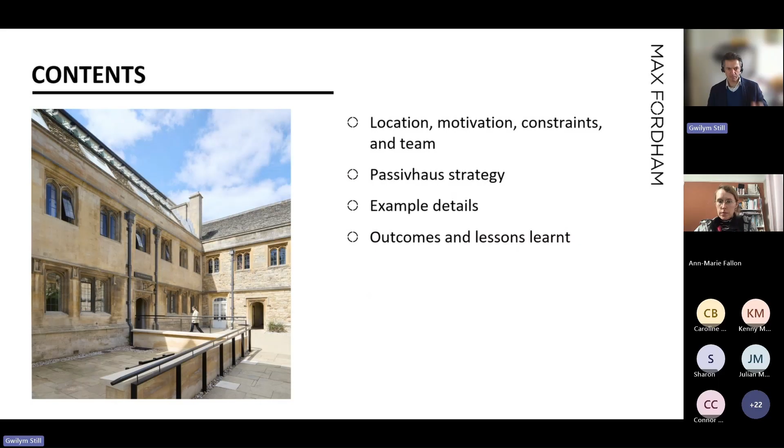Okay, hopefully that's coming through okay. So I'm going to chat about the Spencer building in Oxford, going through both the passive house design side of it and some bits from delivery as well, and then some reflections and lessons learned that we've taken from the project. As a running order: talking briefly about the location and motivation, some of the constraints that came with the site and the project and the team who worked on it, then the overall passive house strategy, and then talking about a few different individual details, picking up on the common features of a passive house project, and then a bit on the outcomes and the lessons learned from it, framing it more widely in other projects as well.

So the brief for the project then really came from Corpus, a very long-standing college in Oxford. They wanted to increase their study space available for their students in particular. They wanted to improve accessibility. They wanted to provide archive storage - they've got lots of precious manuscripts and things they need to preserve. And as with lots of institutions, they're keenly aware of their environmental responsibility as well, so they wanted to do something that was really sustainable. As part of that wider context, they're a long-standing Oxford college, so this is the first time basically that they changed their library in more than half a century. So it's quite a big deal for them and for everybody else who got to participate in it.

What we think has been delivered at the end of the project then is an increase in that study space. They've got 55 new reader spaces and 6 dedicated research desks. Accessibility has been improved, not just within the new library building itself, although that is fully accessible, but also the old library, which we've got a photo of in the centre at the bottom here, has been set up so that now it's got step-free access to that space from within the college grounds, which wasn't the case beforehand.

So it's been really nice to see the kind of benefits ripple out through the wider college estates. They've got the new archive storage space which has been created, and they've achieved Passive House certification, and done it with this stunning building as well.

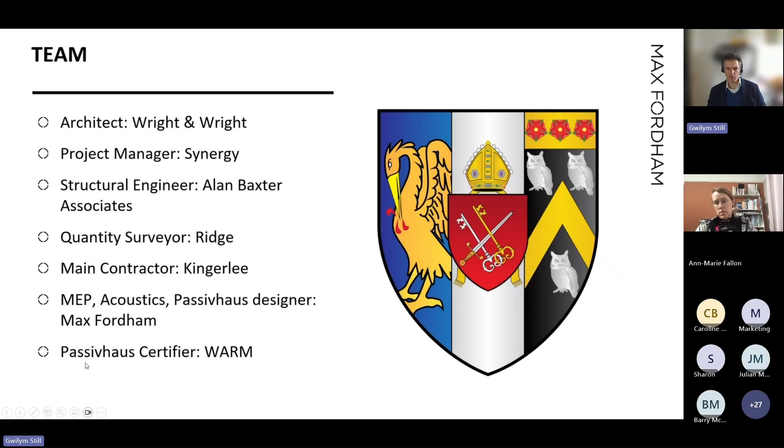Very quickly, we do a range of different bits and pieces on projects, and on this one we picked up MEP, Passive House acoustics, and some other bits of the building physics that go with it.

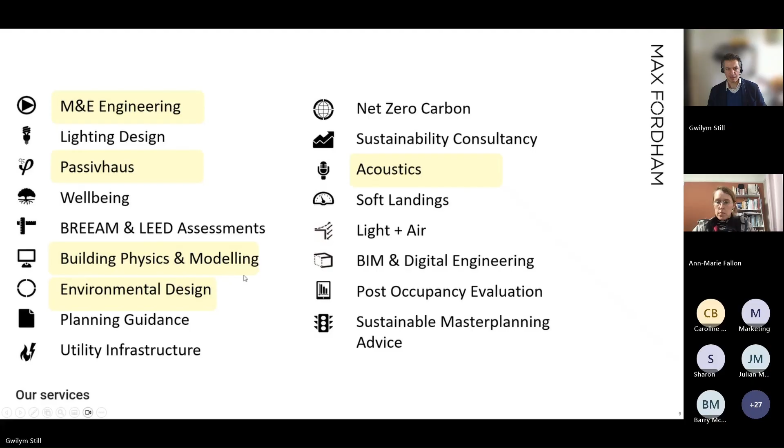For those of you who kick around the Passive House side of things, you often come across Nick Grant, who's introduced me to quite a lot of Eames quotes, and this is one of them: 'One of the few effective keys to the design problem is the ability to recognize as many constraints as possible, and then enthusiasm for working within those constraints.' So if you set the slightly gendered language aside, I think that's a really good approach, and I think that really applied to this scheme.

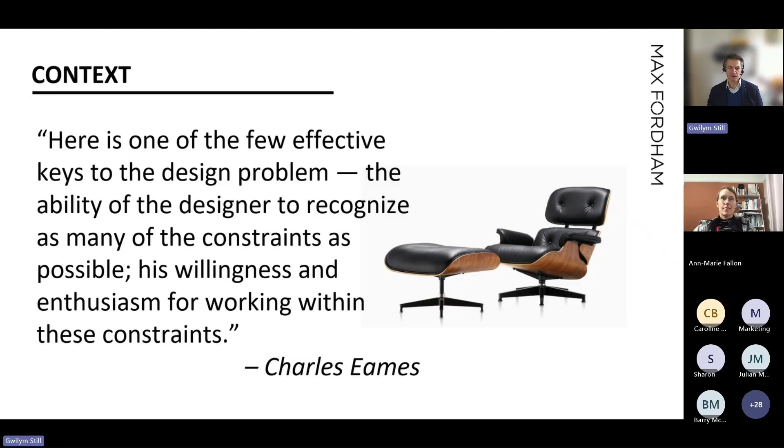So, all in all—I'll date myself a bit—but it reminded me of that record, Stuck in the Middle with You.

So that was at least some of the constraints that we're looking at on the scheme.

The overall Passive House strategy then—you want the massing of the building to be efficient, so that as much as possible the fabric and the form of the building are doing the hard work before we get into any active systems. For people who've come across this diagram before, there's this idea of the form factor of the building, so the total heat loss area divided by the internal floor area. The massing of the building had a form factor in the low 2-ish or so, which is pretty reasonable.

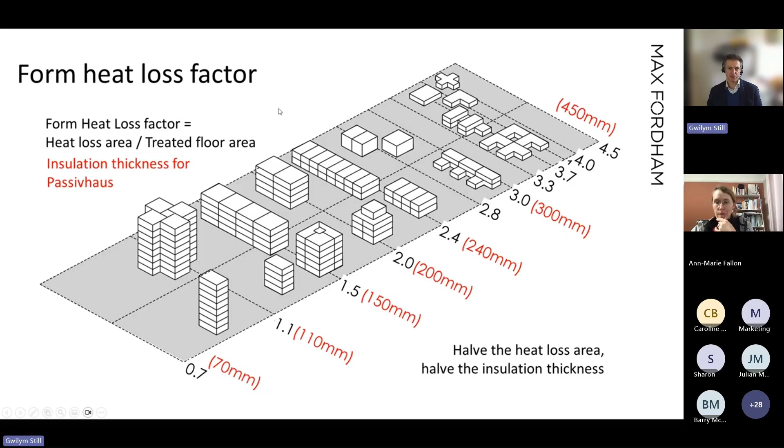So the idealized archive setup, I think, in terms of thermal zoning, would look something nice and simple and a bit like this: archive off to one space where you're quite happy to let that go a bit cooler in the wintertime when you don't want it to get too warm in summer, and it's a fairly free-running space if you've made it really well thermally insulated from outside. Then some kind of buffer space in between the two, and then an office space or other study space that's going to have people in for the majority of the time.

So that's the kind of platonic ideal, I think, and there's some really nice built examples of that, including the Hereford Archive and Record Centre that Architype worked on, and other schemes like that.

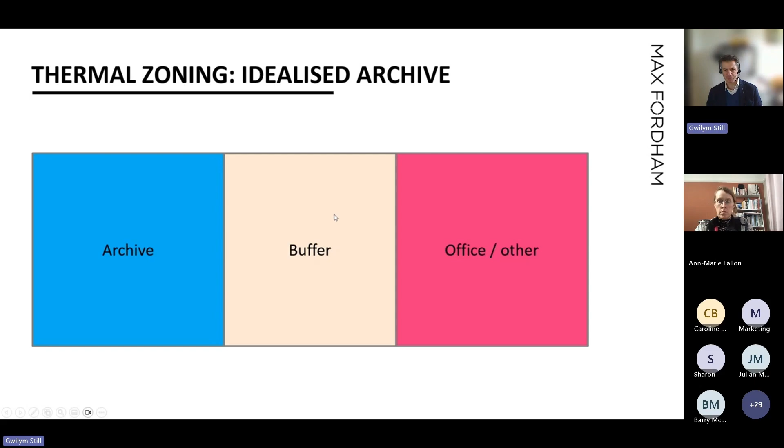Unfortunately that wasn't quite available to us in this scheme, because of the constraints of which sides we could go to. So this is the section through the building, just to show that principal thermal zoning—we've got the archive space, which has been deliberately set up so the two spaces stack.

If you were looking at the other section, the long section through the building, it's been neatened up there as well, so it's as close to a cuboid as we can get it, and is fairly compact. We've got plant space down in the basement, partly because we need somewhere to put it.

We're also housing some of the legacy kit that's serving the adjacent buildings, and the roofline is pretty well defined and tightened up. You can just about see the outline of the adjacent buildings behind.

And then we've got the main occupied spaces. You can see there's first, second and third floor study spaces with views to outside, and some more internalised spaces, and then open racking on the second floor.

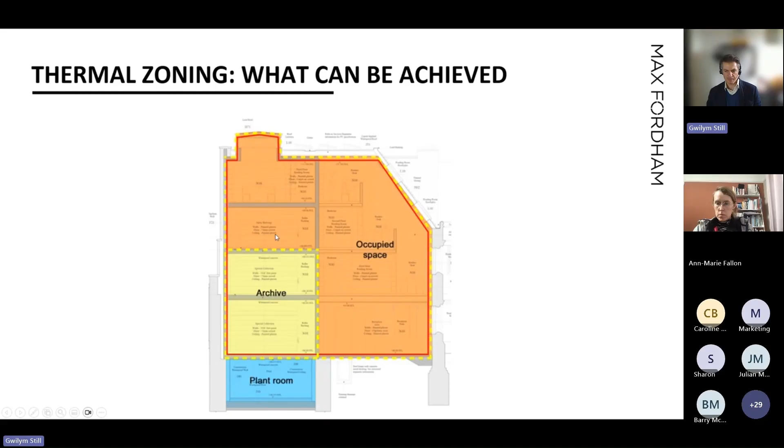I won't expect you to read the plans in lots of detail, but just to know that, if I use the pointer, this is the outline of our new building, and this is actually some of the adjacent building we're abutting onto and connecting onto.

Same at the south, this zone has got the archives in it, and you can see that at the first floor above. The stairs come through and let students and others onto these study spaces. On the east elevation here, you can see we had some facade retention as well.

So it's very much kept cozy on all sides, really, by what's around it.

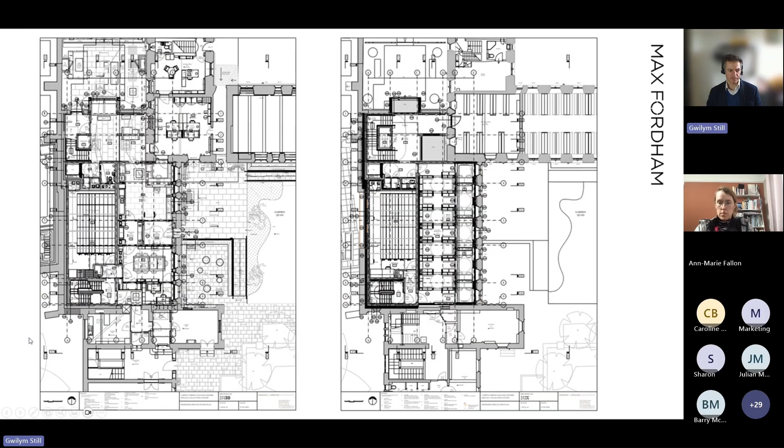One of the bits that was quite interesting for us for this particular library and study space, distinct from a more conventional municipal library, is that when we talked with the college, they keep this space open 24/7 for not quite 365 days a year, but very close to that. And that gives some interesting differences.

It means that the ventilation systems are going to be running all the time, giving fresh air to people who need it in the buildings all the time.

We talked through with the college to understand what they thought those occupancy profiles actually looked like, including exam times, slow times over holidays, etc. And we set up the energy modelling in the Passive House Planning Package, the Passive House energy tool, to reflect those. So we wanted to do that.

We want to encourage good decisions and best reflect the building as we can in the modelling. With those relatively high levels of ventilation, you pay for that a bit in terms of fan energy use, and in terms of the heat loss from the building that ventilation brings with it. We didn't want to be artificially penalised for either of those, we just wanted to line the two bits up.

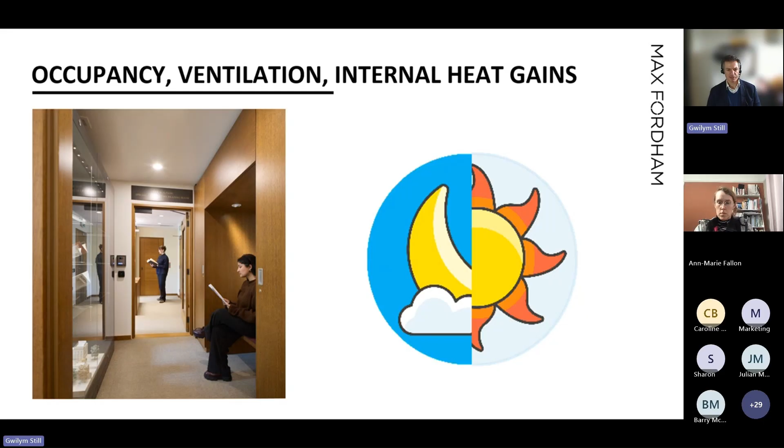We knew we wanted the scheme to be all electric in terms of space heating, and that we wanted capacity to do a little bit of cooling for the archive space for current conditions, and to be future-proofed for some active cooling as the climate continues to heat up for the rest of the building. So the approach for this scheme is that it's heated by a ground source heat pump.

This view on the right, if I get the pointer, is from the north elevation of the new build, looking up through that landscaped area coming just to the north boundary of the site. So we've got a fairly low capacity ground source heat pump.

So the passive house approach is really good for minimizing that heating demand.

The PHPP was also useful because it gives you a heating demand profile over the whole year, and so we were able to use that to help inform the design of the borehole system. We could give that to the ground source subcontractor and say, this is what we need out of the ground each month, and this is what we want you to size the system to be able to deliver.

And we're delivering that heat into the building through underfloor heating everywhere. That's not mandatory for a passive house scheme by any means, but it does mean we can deliver the heat really efficiently. It means we haven't grabbed any of the fairly at a premium floor space within the building, and we've got the option in the future to run that in reverse and give a little bit of background cooling through the building as well, which is quite nice.

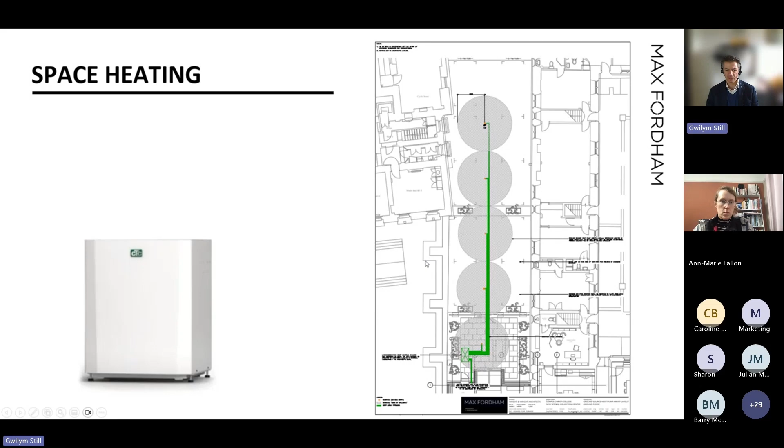The cooling for the archive is basically delivered by taking the groundwater from the boreholes and putting it through a heat exchanger to cool the supply or recirculated air into the archives down a bit. So it's a fairly low energy way of taking a bit of heat out of those spaces.

We'll talk about ventilation in a bit more detail later, but just principally to note, we've followed the same sort of cascade ventilation approach that you'd use for a passive house, but beefed it up a bit for a larger building. So supplying air into fresh air rooms, like the occupied spaces, transferring through intermediate zones, and then extracting from spaces with particular pollutants in, like toilets, storerooms, etc.

On the domestic hot water side of things, there's not a huge amount of domestic hot water demand in the building. It's quite distinct from a hotel or student accommodation or something like that. So we tried to just keep things really simple. Rather than putting in a hot water heat pump and then a big circulation pipework loop, we've taken the approach that's been used on lots of other passive house schemes of just going for nice, simple point of use water heaters with minimal to no storage loss and putting them very close to the outlets. There's very little distribution loss as well. So bits like the cleaners cupboards and the toilets and a few other wash hand basins are just fed from these little electric point of use water heaters.

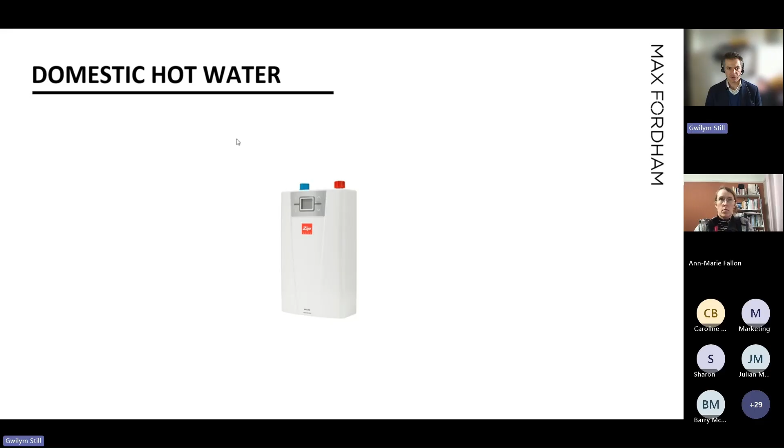So that's the general approach for the project, and then we'll go through a couple of example details for some different aspects of the passive house side of things.

Starting off with the ventilation and the mech vents with heat recovery that we've got. This is the high level concept really: we don't want to move too much air around the building, we don't want to have more ductwork than we need, more plants than we need, and more energy use than we can get away with, but we still want good levels of air quality through the whole building. So the cascade approach with supplying fresh air into the occupied spaces, transfer through intermediate zones, extract from rooms with lots of pollutants in.

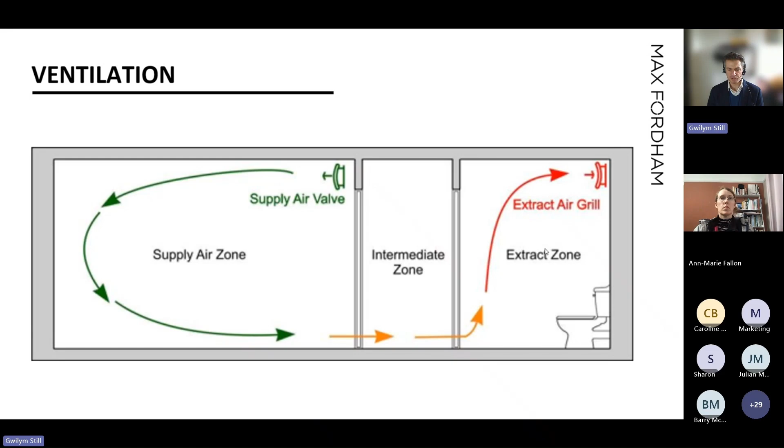The actual approach we've taken here - this is a basement plant room you can see on the right hand side. That's where the ventilation unit serving all of the study spaces lives, and the vent unit for the archive as well. It's terminated to outside. On the right hand side here, these are two little light well details where we're running some ductwork through the wall to get to outside. You could see from the section there's not really space up on the roof to put the unit in a slightly more simple arrangement, so we're tucked down in the basement, completely out of the way, and actually outside the thermal line of the building.

So the supply and extract ductwork, which is what's shown in the blue and the pink here, basically runs at high level through this basement space and then goes up through the floor insulation, and at that point it enters the thermal line of the building.

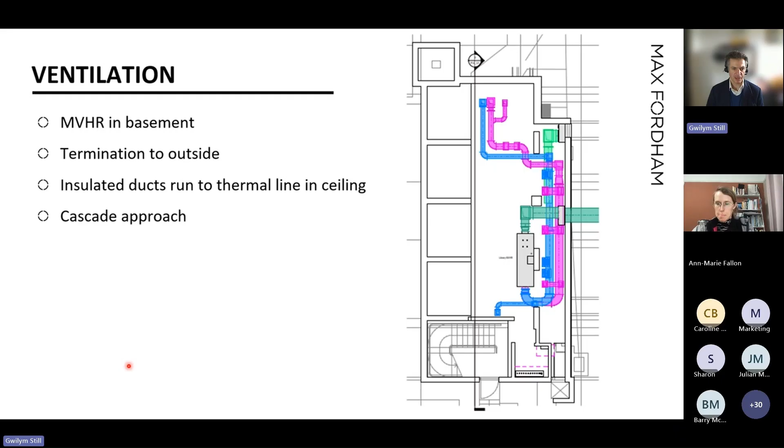And if we look at that on an example section for the ground floor, I've just color coded some different spaces so you can see green are spaces that we're supplying fresh air into - here's an office and reception space on the ground floor, a meeting room and a small office as well. Yellow are transitional spaces that we're transferring air through. So the air put into this space, for example, transfers through this little waiting room and then gets pulled out of the other adjacent spaces. Similarly, where we're supplying fresh air into the lobby here, it comes through into this circulation space in the stairwell, and then is extracted from the toilets and so on.

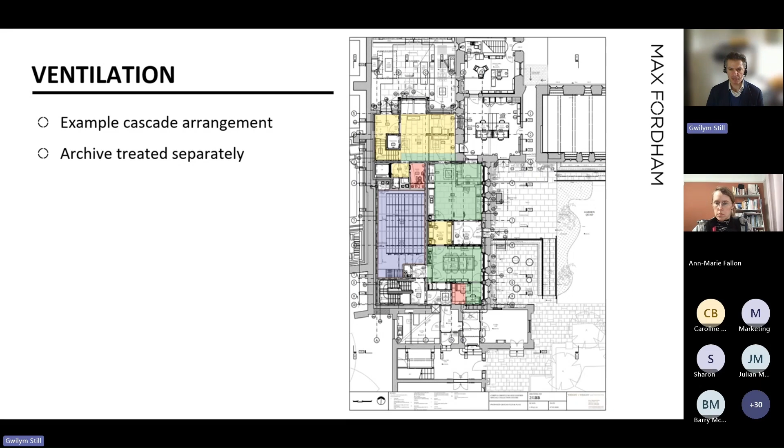The archive in the blue here is treated by a completely separate system because we're using very, very low ventilation rates for that, and we want to remove a little bit of heat from there at times of year when we don't want to from the rest of the building as well.

Moving on from ventilation to air tightness, we've got two different primary structure arrangements for the building. The archive is basically a concrete box, made to be as close to bomb-proof as possible, because you want the material in there to be safe and protected even if something horrific happens, like the building going on fire. The rest of the building, for a range of reasons, is a steel frame setup, and we've picked an air tightness strategy for each that suited the particular structure and the build-ups that went with them.

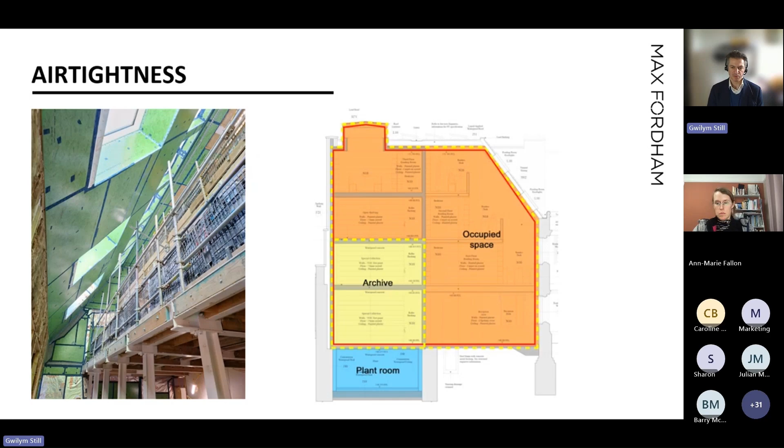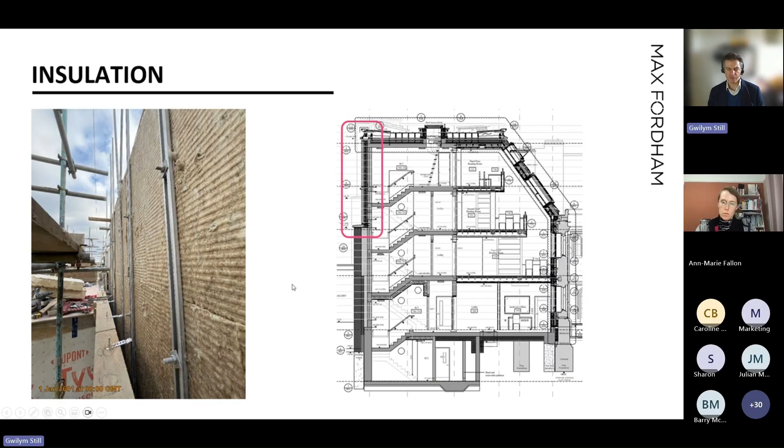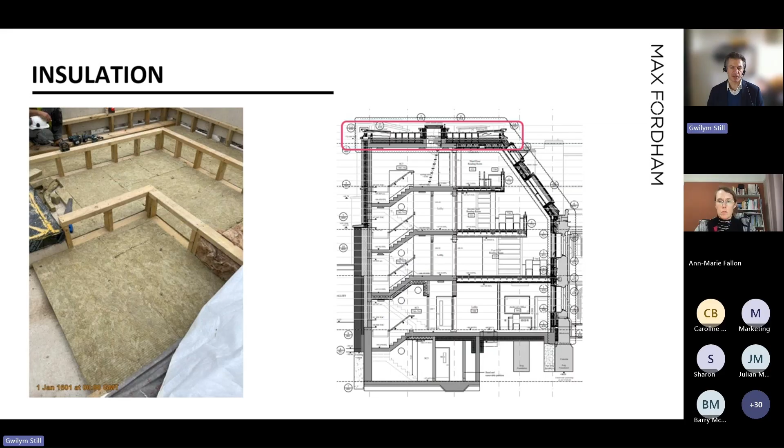Both of those photos are taken from the site QA which Kingerlee did, and then submitted through as their evidence. I think they did a really nice job of integrating that into their own in-house QA system, so it ran as part of an integrated process rather than a separate standalone overhead thing to have.

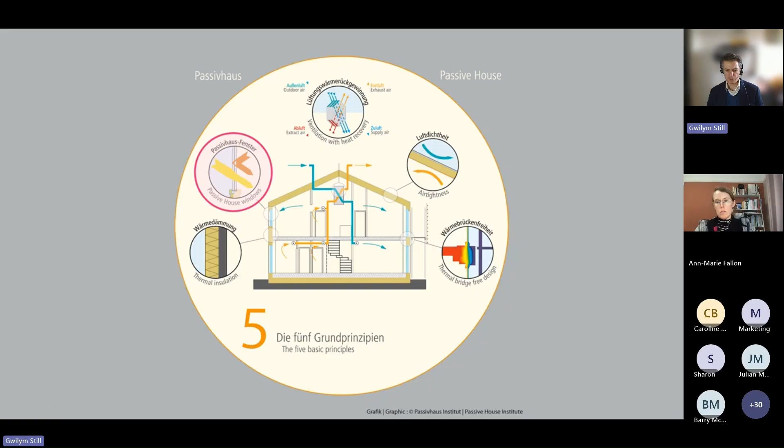And then finally, out of the 5, the windows side of it. I won't talk about all of them, but I think one of the most interesting ones was this retained facade approach we've got, where there's historic windows here - single glazed, thermally terrible, air tightness terrible, but for historic reasons we want to keep them.

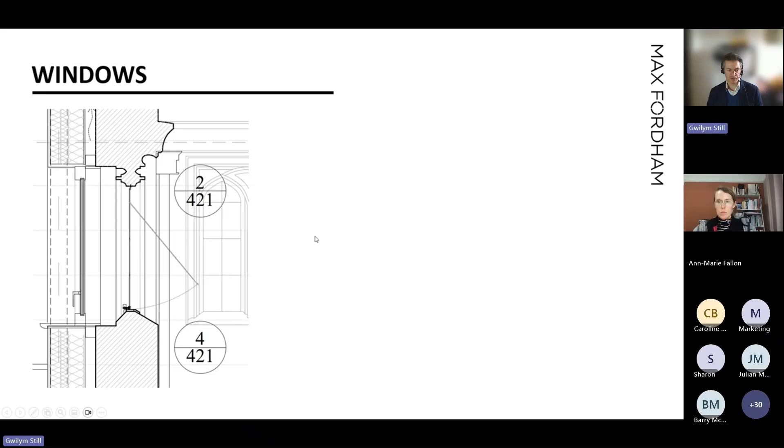You can see on the left hand side where the thermal line of our building is, where the airtight line of our building is, etc. We made the decision to keep the existing windows, but to use them pretty much like a sacrificial thermal line, and to not rely on them for any kind of energy saving performance.

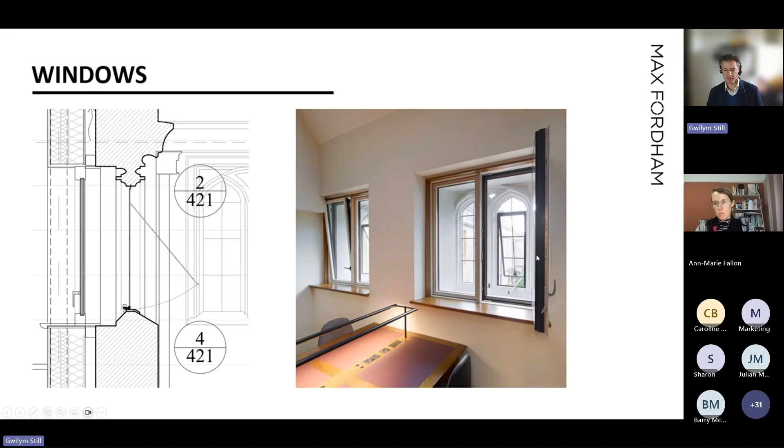The right hand side is what's actually being installed. You can see we've kept the existing windows basically propped open, allowing air to come through and ventilate whenever the internal windows are open. The internal windows are set up so they can operate in tilt mode, like you can see in the left-hand one, and crack open to let a little bit of air through for mild cooling in summertime, then can open wide if people want to do purge ventilation or remove heat more quickly in the summertime.

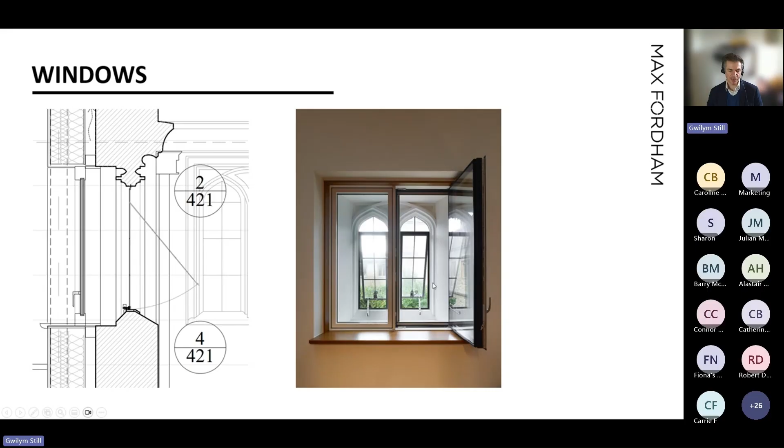We did the modelling work to pick up the reduction in solar gain from the glass and the framing, and to factor that into both the daylighting modelling and the solar heat gain modelling that happens within PHPP.

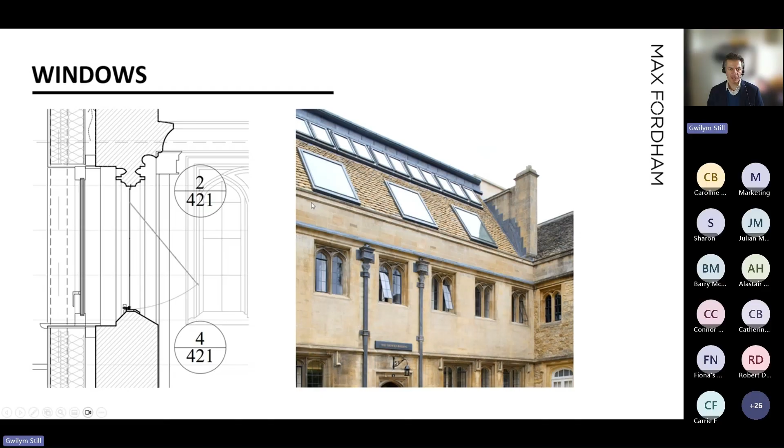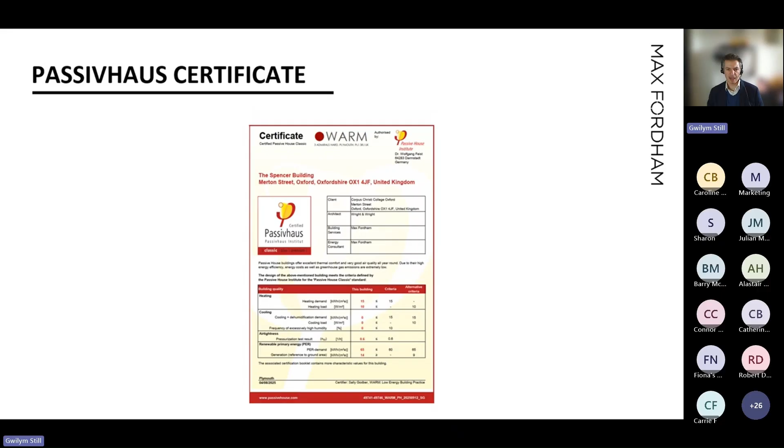In terms of outcomes, we've got formal Passivhaus certification, which is great. The overall air tightness is about a permeability of 0.6 cubic meters per meter squared per hour, which we were happy with given the complexity of the project. The in-use energy figures are definitely an upper bound, since we didn't have the meter reading when the building was initially occupied, but it does meet the UK net zero carbon building standard target for higher education buildings, which is good.

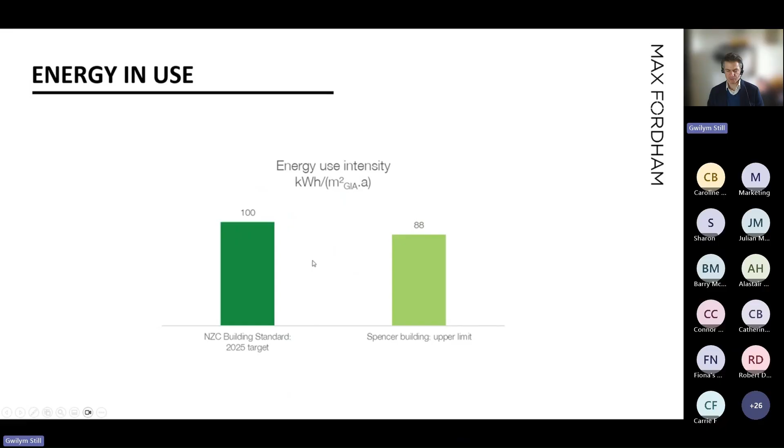Very quickly for lessons learned and reflections, on the air tightness side, I think the basic strategies we had worked well, but we found it quite difficult to do some of the temporary sealing to test our building distinct from the two adjacent buildings, north and south. If I was doing the project again, I'd probably try to build in more of a sacrificial airtight line, one made just to help with testing rather than because it was needed long term.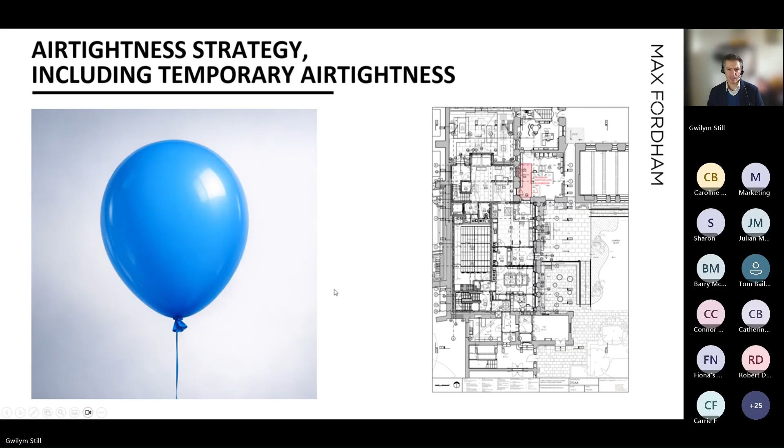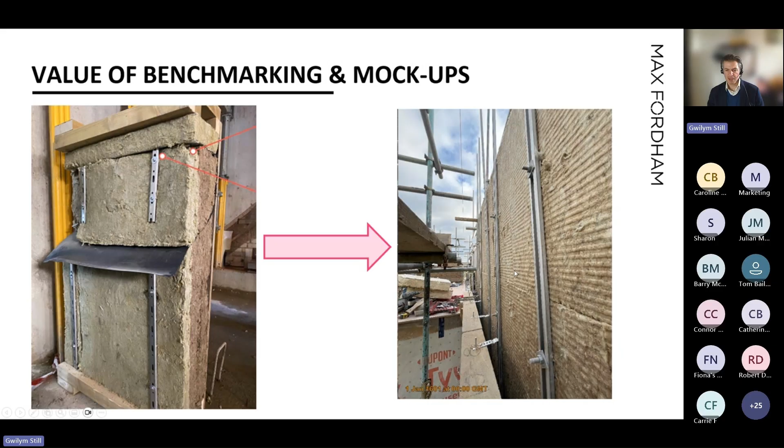We did quite a lot of benchmarking with Kingerlee, and they engaged with that really well. I think that was valuable because it helped us go from initial details, like the mock-up on the left which was built off the critical path of the building and was generally pretty good but had a couple of niggles that needed addressing, to getting this really high quality install on the right hand side, and that being able to flow through the general construction process.

We've really liked having access to and being part of that wider Passivhaus community, both the Passivhaus Trust and the AECB, for some of the case studies that helped inform the design for us. I think one of the good things about these projects is just to try and execute the basics really well.

I quite like this game of Go, and there's a quote from a professional player saying you can consider yourself an expert if you just keep making ordinary, sensible moves. You don't have to do anything flashy or brilliant or exceptional - just keep making sensible decisions and follow them all the way through.

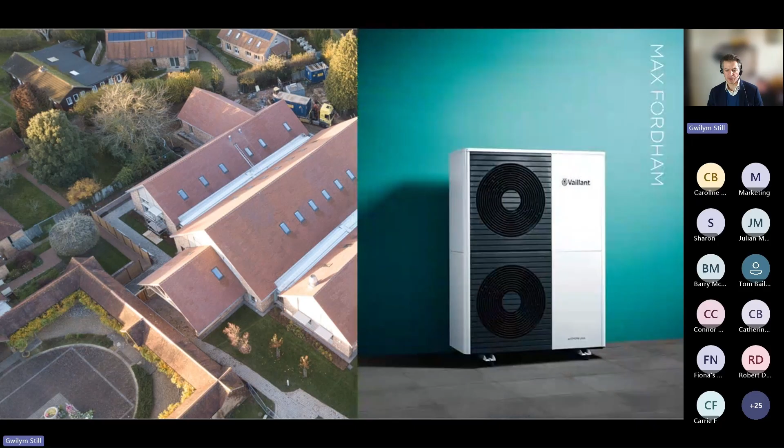And this is a Passivhaus Buddhist monastery project we worked on, which was interesting - an example of a building that's not certified but has followed the Passivhaus approach generally. It's got an air source heat pump, so it's all electric, delivering space heating and domestic hot water. This is the heat pump unit on the right-hand side - the scale's a bit wrong so I've corrected it. This little 12 kilowatt heat pump, tucked just around the corner, is doing this 1,200 square meter building.

Very quickly, we've also seen it be useful to use some of the Passivhaus tools for decarbonisation schemes, including this one also in Oxford, where you can use the PHPP, benchmark it against measured heating use, and use that to help pick out the most significant energy using items to focus on.

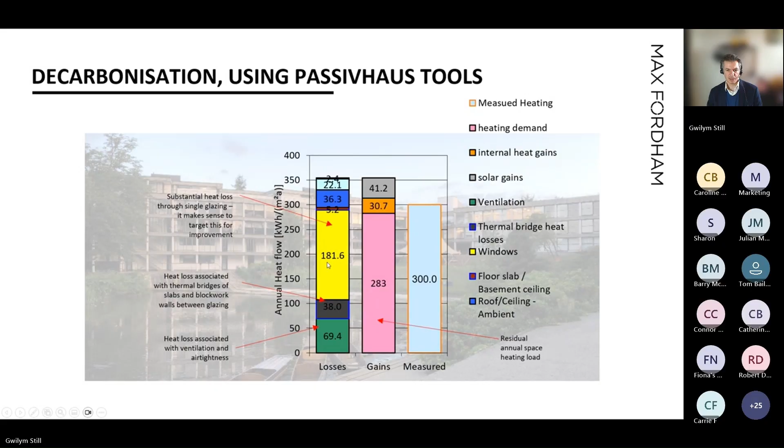So I'll skip that. Our overall conclusion was: we think it works. We've been fortunate enough to take a challenging site with a really good team, both on the design and construction side, and deliver a low energy, high comfort building, which we think delivers really good architecture as well. So thank you very much.

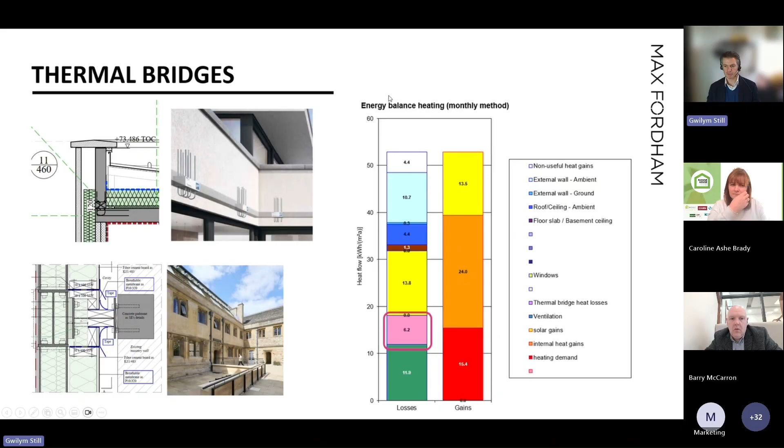Okay, I'll not hog the floor, but I do have another question. It's probably one everybody thinks about, and again we have to caveat this by saying it's within the Oxford estate, with lovely, beautiful heritage buildings, so there can be increased cost implications with that nature of building. But I'm not asking such a direct or blunt question about capital cost - it's more about the prospective running cost this building will have now, meeting this high standard, versus probably the horrendous running cost the estate had to suffer year on year in the older building.

Yes, that's a good question. I don't have amazing figures for Corpus particularly, because the process for this one was effectively that we got invited during RIBA stage 2 to do a feasibility study to ask, could you deliver this project as a Passive House scheme, and what would that involve? So we worked through that, and it went to the college, and they said yes, we want to crack on with it.

We do have some figures from the retrofit scheme, the Utopia one I flashed up very quickly, where we saw about an 85% drop in operational energy use between the pre and post retrofit scheme, off a couple of thousand square metre project. We think, touch wood - and who knows what's going to happen to fuel costs given everything that's happening - that saw a drop of about 150,000 a year in the fuel bills for that building. So yeah, there's some real money on the table for some of these schemes, particularly on the retrofit side of it.